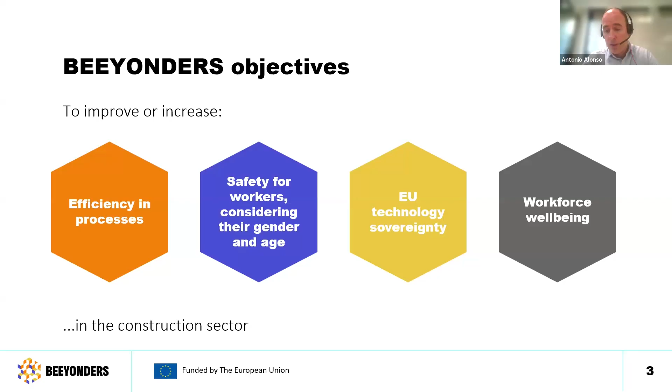Next, please. Well, the main objectives of BEEYONDERS are based on 4 pillars. To increase the efficiency in processes. The idea is to do the same with less energy, or in a better way with better productivity, with more safety, improving efficiency in terms of energy. The second pillar is to increase the safety for workers, considering their gender and age. The project is very well focused on these aspects. The third is to increase technology sovereignty in the European Union, trying to use as much as possible technologies made here in Europe, and to generate new technologies here in Europe. And the fourth pillar is to increase workforce well-being. This is an important aspect for this project.

As we have said, we have 21 partners. We have consultancy companies, technological centers for development of robotics, digital twin developers, partners for communication and dissemination, experts in concrete, in 3D printing in concrete, biologists. We have managers of highways, experts in LCA and LCC, experts in wearables, exoskeletons, experts and associations of workers, experts in standardization, manufacturers of construction machinery, experts in monitoring, and of course construction companies. At Acciona, we are also a construction company, very interested in the development of all these technologies.

The technologies that we are going to see today in this workshop are mainly three. We have focused our work on autonomous and teleoperated ground and aerial vehicles. In fact, we will see today an autonomous mobile robot for infrastructure maintenance. We will see autonomous wheel loaders, and we will see drones working all together to improve the efficiency in roads.

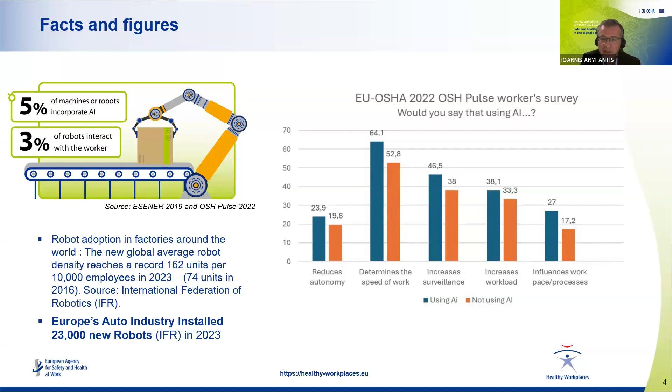So when it comes to applications like those that are included and discussed in your project, we can see that when we are having, for example, robots interacting with workers, or when we are having wearable devices, workers report more time pressure, job insecurity, poor communication or cooperation, and long or irregular working hours as some of the potential risks. To that end, at EU-OSHA, we always support initiatives and projects like the BEEYONDERS project, since the inclusion of safety and health provisions since the design phase is the most effective approach when it comes to the protection of workers.

And this project and the previous research that we have conducted present that the technology and the use of digital technologies have significant opportunities when it comes to occupational safety and health, but also when it comes to performance. But risks should be effectively managed in order to protect workers as well.

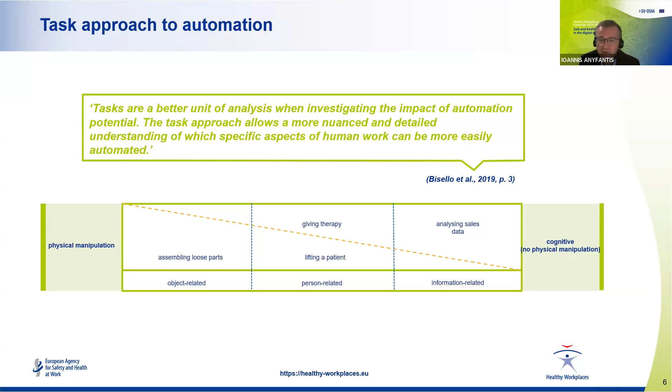So these new digital applications and AI can actually perform some tasks. And ideally, the most dirty, the most dull, and the most dangerous tasks should be performed by machines or these kind of automations, and the most creative tasks should be performed by the workers.

And in order to identify the risks and the challenges and opportunities associated with occupational safety and health, we developed this taxonomy on systems that would also allow inclusion of technologies that didn't exist back at that time. I think that we started the development of this taxonomy back in 2020, and applications and technologies such as generative AI and GPTs didn't exist back at that time.

So the main categorization had to do with whether the task was physical or cognitive, or a mixed task. If the task was a routine task or non-routine task, and if we were talking about assistance in decision making, for example, or full automation and substitution of the workers in performing these specific tasks. Of course, in this short presentation, I cannot go into all the details of this research because we are talking about more than 5 years of research and 5 big overview projects.

However, I will just mention that when it comes to the automation of tasks area, the main sectors we identified, both based on the literature but also based on the actual market in the EU and outside the EU, were manufacturing, transportation and storage, human health and social work activities, professional, scientific and technical activities, and construction.

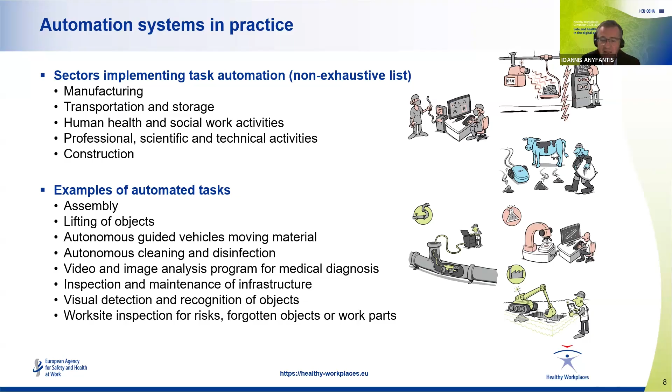And in order to approach our audience in an easier way, because digitalization is not the easiest topic when it comes to occupational safety and health, we developed several case studies. In total, more than 50 case studies were developed for all these different areas that I mentioned, 16 of them on automation of tasks. And for each one of these case studies, we developed a cartoon-style representation in order to present the solution presented in the case study in an easier way.

So one of the case studies which we developed had to do with vehicular automation. Think about a software and hardware automation system installed into an excavator, for example, that would allow this construction equipment to dig trenches in an automated way. So the operator was not on the machine anymore. The machine could operate either in a fully autonomous mode or the human operator could still supervise the process from a nearby location.

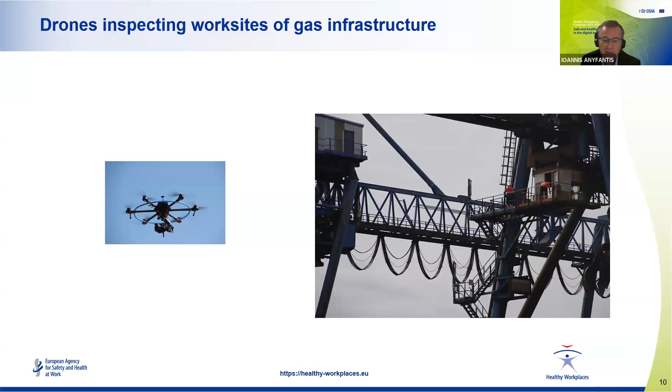Another case study that we developed had to do with some drones inspecting work sites on gas infrastructure. So these drones were used in order to identify if there were any forgotten tools after specific maintenance procedures were performed, a task that in the past was performed by workers and was considered to be a dull task. Now it could be performed by those drones and could improve the performance of the process.

In general terms, the main opportunities and challenges for occupational safety and health were categorized in three main categories, dimensions that are the physical, the psychosocial, and the organizational. In there, we identified issues that had to do with job demands. The issues of job autonomy were extensively discussed.

Trust and job transformation, and specifically the impact on mental health, like stress and anxiety, when it comes to these automations and increased risk of developing this kind of psychosocial stressors, let's say, to workers.

When we are talking about trust, we are talking about trust in the technology, but also the different ways that the work site should be organized now, because the introduction of such intelligent machines is changing the whole way that the job is performed. And it's not like a simple automating system like those introduced in workplaces in the past.

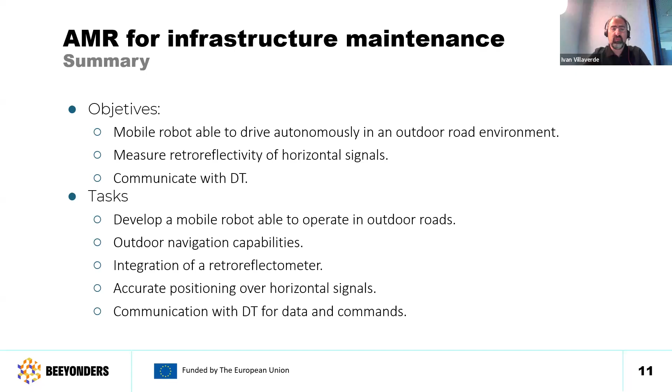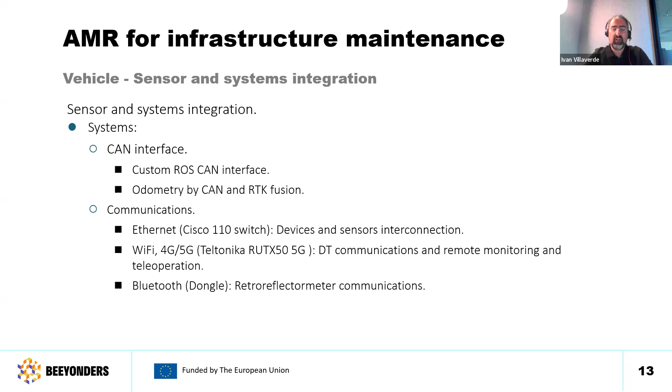Next slide, please. But the key sensor to be integrated for this application is the retroreflectometer. It's the sensor that is actually used for measuring the reflectance of the horizontal lines. So two aspects of the integration have to be considered. On the software side, we have developed a custom ROS driver, which allows us to control the device wirelessly through a Bluetooth connection and directly from ROS.

And the hardware integration was a bit more tricky, mostly because of the clearance requirements of the sensor, which required it to be placed very close to the floor and with enough free space in front of it. So, next slide, please.

So the initial designs were those you see here. Basically, they were very basic cushioned platforms in which we mounted the sensor. We discarded these early designs because we considered it was too dangerous for the sensor to be so close to the floor, only 11 millimeters at all times, while the robot was driving fast on the road.

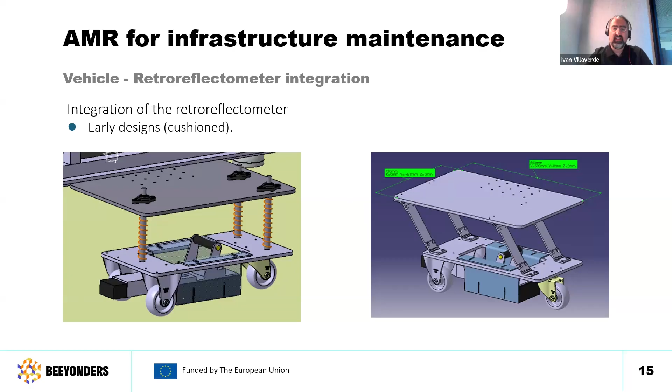So if you remember the picture in the second slide, I think, there was not much protection for the sensor and all the equipment that we had put on the platform. So the first rainy day of testing, and we surely get a lot of those here in the Basque Country, we realized that it was not a very bright idea to have all the sensors like that.

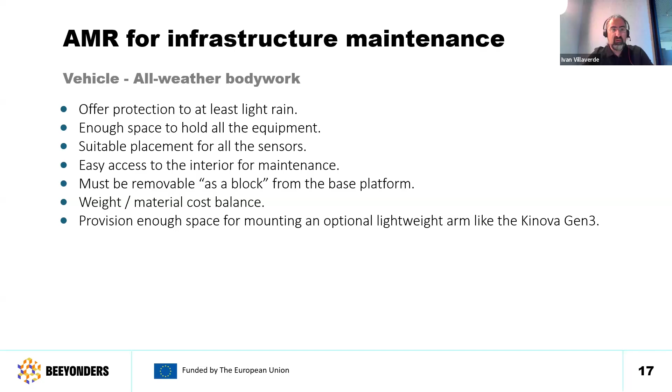So we thought we had to install some kind of all-weather bodywork that offers some protection from at least light rain, with enough space for all the sensors and other equipment, and with some requirements like an adequate weight-cost ratio, being easily removable, etc. So next slide, please.

Next slide, please. This bodywork is also complemented with several 3D printed parts that we use to protect external elements like the cameras and the lifting mechanisms of the platform and so on. Next slide, please.

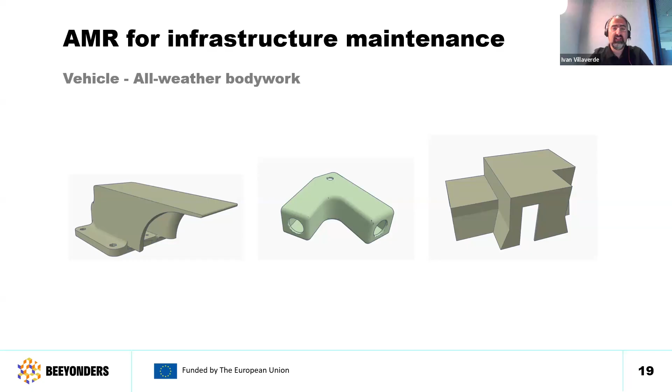We also considered some additional designs to protect the sensor, mostly from debris and splashes, but we didn't include them in the final prototype because we didn't find them really necessary, and they were adding a lot of complexity.

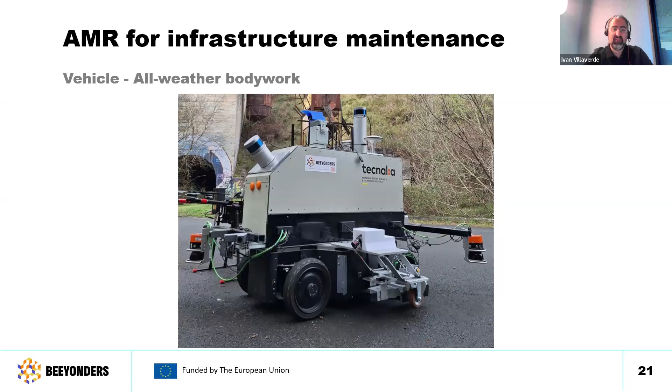So next slide, please. This is the final implementation of the bodywork as it was used in the initial field test. From this one to the final demonstrator, we made only very minor changes. Basically, we changed the position of the GPS antennas. Basically, that's it. Next slide, please.

So once the AMR prototype is completed, the next step is to equip it with the required autonomous capabilities, starting with autonomous navigation. In this case, we wanted to test three different available approaches. The first one is the ICARS commercial solution from LS2N. The second one is a custom 3D navigation suite that we have compiled here at Tecnalia from off-the-shelf components available in ROS. And finally, we also wanted to test a GPS-based solution for featureless scenarios where a map-based approach could be difficult to apply.

Also, the three approaches have an additional layer that translates the robot's estimated position in its own framework to UTM coordinates, so it's easier to integrate with external systems having a common framework. So now we are going to briefly review these three approaches.

So next slide, please. The ICARS solution is a commercial system based on 3D LiDAR, GPS, and inertial fusion. It uses 3D LiDAR to perceive its environment, but it flattens the 3D scans into two-dimensional maps. This 2.5D approach is more robust for outdoor operations than purely 2D approaches, but it still doesn't take full advantage of the 3D information provided by the LiDARs.

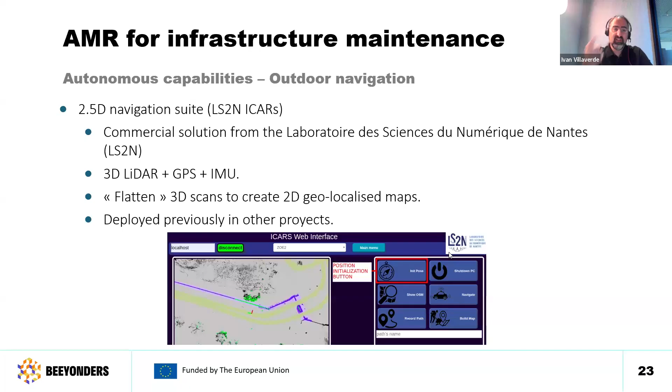So next slide, please. We also tested this full 3D navigation suite. This is a suite that was compiled by us in Tecnalia as the result of previous EC projects. We basically integrated several independent solutions into a single, easily deployable 3D navigation suite that we have successfully used in various robots right now. It's basically based on three rather common or popular modules. So we use LIO-SAM for mapping, HDL for localization, and for planning we use a combination of grid maps, estimation of the transitability, and the ROS standard navigation stack.

So next slide, please. So basically what we do is we use 3D LIO-SAM to create a 3D map, as the one you see here in the top left. And this map, we use it along with HDL to provide a localization within this local framework.

From this 3D map, we also extract the floor as a surface that you can see there in the bottom left. And we use this surface to estimate what we call a transitability map that tries to represent the places where the robot is actually able to reach. We calculate this transitability map based on the slope and the roughness of the floor surface. So next slide, please.

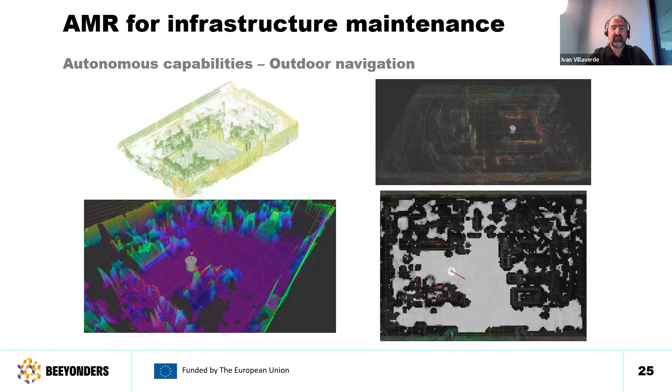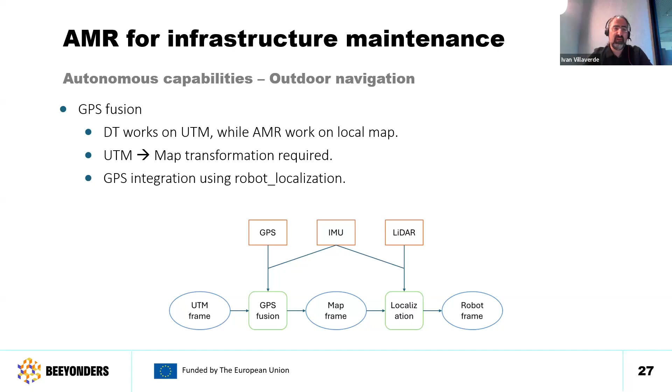So next slide, please. So for the GPS and inertial fusion, we have used the robot localization module that is also a rather popular module in ROS. In this way, we are able to provide the robot pose in UTM coordinates regardless of the local world representation used for localization, whether it's 2D map, 3D map, or mapless.

So next slide, please. So the second requirement for autonomous capabilities is the measurement of horizontal signs with the retroreflectometer. So this device needs to be placed very accurately over the line to be able to provide good readings. So to guarantee that, the robot should be able to detect the line and to direct itself to the correct position. So next slide, please.

So for this task, we follow a visual servoing approach. We use a camera mounted coaxial to the sensor, just over the sensor in the liftable platform, to capture images of the line that is in front of the vehicle. The line is detected in the images, and we calculate a vector that represents the direction of the line. This vector provides the distance of the line to the center and the angle from the correct alignment.

So these two values are fed to a PID controller that calculates the steering and the speed that the AMR requires to drive the sensor to the correct position. So next slide, please.

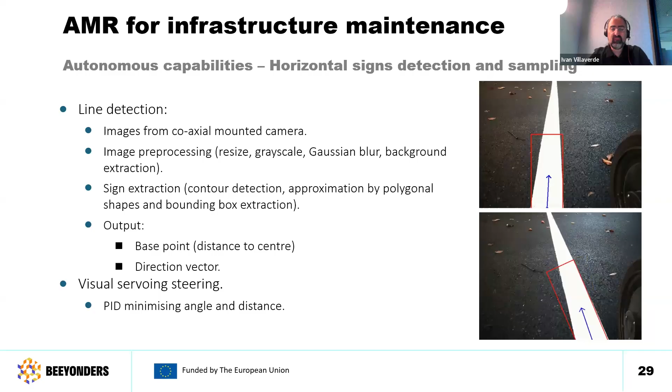So next slide, please. This takes us to the final autonomous capability, which is to be able to carry out arbitrary measurement missions. So this functionality is achieved using Tecnalia's Flexbotics Execution Manager. This is a system based on state machines that are able to execute missions or tasks defined as a sequence of skills. So the missions that we receive from the digital twin are decomposed in those skills like navigate to, detect line, deploy sensor, etc., creating a state machine-based mission that we can execute with the system.

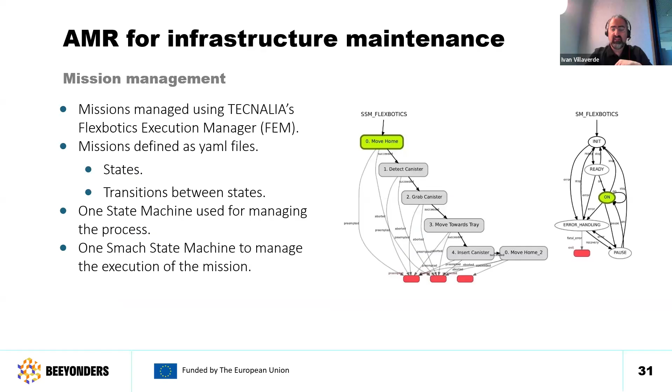So next slide, please. So we have made several testing rounds of the system. The testing during development was done at our facilities here in Donostia. We were pretty lucky because the parking was empty due to ongoing construction works, so we were able to use it for testing. So during these tests, we focused on testing the platform itself, the vehicle, and the different modules, but independently. So next slide, please.

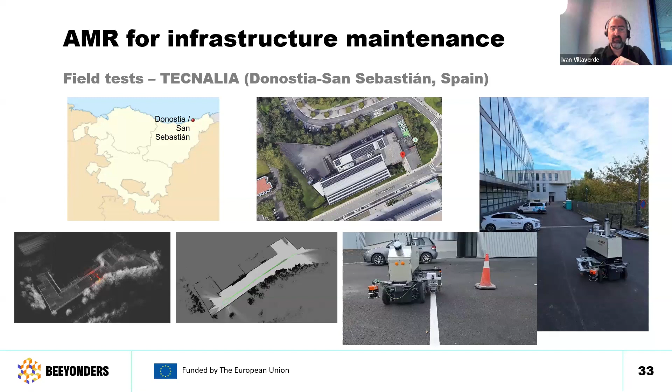So this early test of the almost complete system allowed us to really reduce the technological risk of going directly to the final demonstrator and to identify some improvements that were implemented for the final demonstrator, like for instance the updated placement of the GPS antennas that I mentioned earlier. So next slide, and with this, I conclude my presentation.

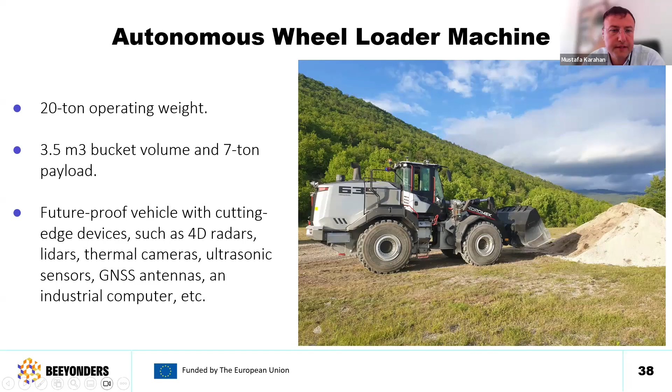For building the autonomous machine, it is mandatory to communicate between the industrial computer and the machine's own systems, such as the steering system, brake hydraulic or implement system. So we developed algorithms and software concerning the operator's and machine's conditions. Next slide, please. Could you please click the video?

As you see in the video, this machine is controlled autonomously. There is no human control. The machine follows the trajectory and loads the gravel. So the map of the location was created from the data recorded by the drone's onboard sensors and adapted to the autonomous wheel loader. For this case, first the drone mapped the area, then sent the wheel loader. We established communication between the wheel loader and the drone. Next slide, please.

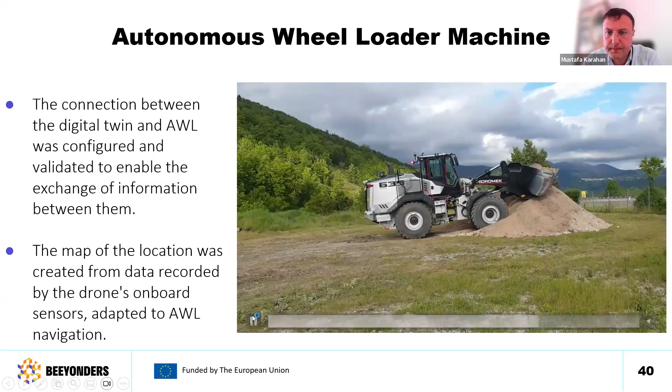Video. During the road construction use case, a typical and very common operation named Y-cycle was tested and validated. It is very common for this case. And we illustrate the autonomous and teleoperated functions. Next slide, please. In the Y-cycle use case, or load and unload, the machine needs to load the bucket fully, then needs to unload in another area or in a dump truck. Next slide, please.

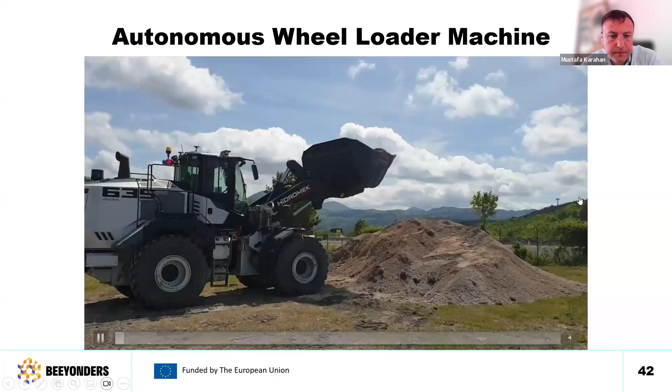Click the video. The other very common working condition is load and carry. The machine loads the gravel or debris from one place and carries it to another place. So in this video, the machine detects the obstacles in the field. Then it is possible to unload the bucket by detecting any obstacles in the field.

In this test, the machine traveled from point A to B autonomously and safely. It followed optimal trajectories by avoiding any obstacles, in areas which are frequently accessed by human operators or any machines, any vehicles.

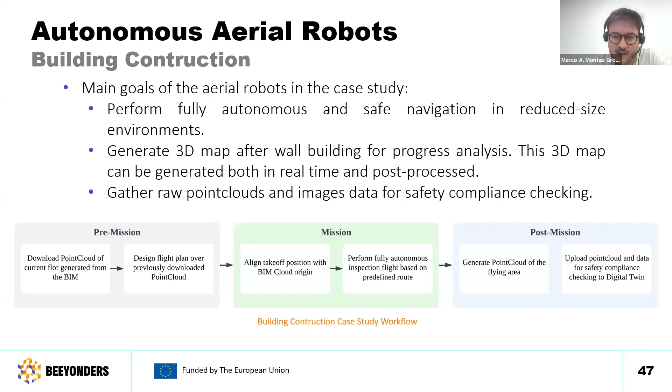Next slide, please. This is a small overview of the software architecture. Maybe it's too technical, but the good point is that it's designed as a modular architecture in order to allow the operator to change things if needed. For example, if you want to change the localization algorithms, it's easy to change, or if we want to change the navigation, it's easy too.

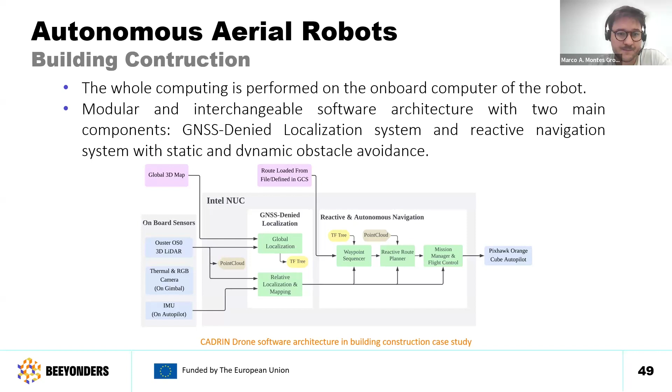the safe navigation. One important and remarkable thing is that all the operation is fully autonomous from the takeoff to the landing of the drone, and everything is computed on board. So in the case that, for example, you lose communication, the drone will finish the inspection in a safer way. So next slide, please.

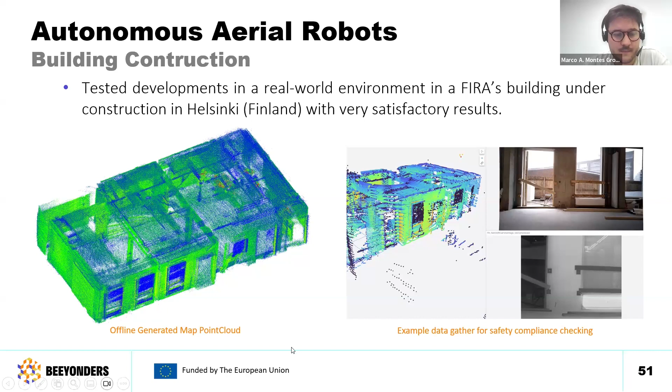And on the right, we can see how these RGB and thermal images look with the point cloud in order to perform these safety analyses and so on. Next slide. Okay, that's all for the building construction case study. Right now, I will explain the outdoor case studies.

In this case study, the advantage that we have is that we will use GNSS localization. So we focus on or reinforce different things. In the case of road maintenance, the main objective was to be able to perform an assessment and analysis of the road and the environment of the road in real time and inside of the drone.

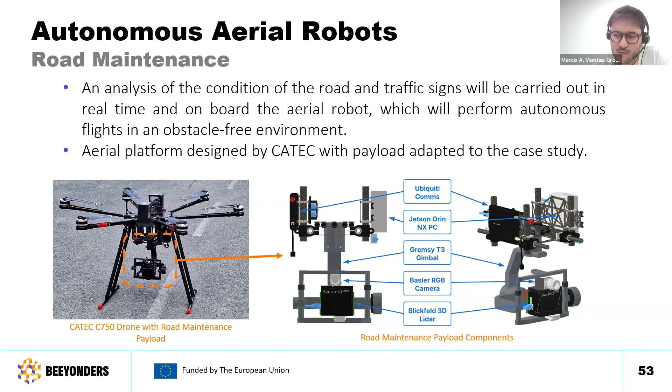With the camera, we will be able to see the road and to perform this image analysis. And with the LiDAR, which is perfectly calibrated and aligned with the camera, we will check the state of the vertical signs. So next slide, please. As before, this is a small overview of the software architecture.

We focus on the design and development of a very modular software architecture in order to easily be able to change, let's say, the focus or the tasks to be developed by the drone. But if it's needed, we can reuse the drone itself. So next slide, please. Okay, this is a video of the drone itself flying in L'Aquila in Italy.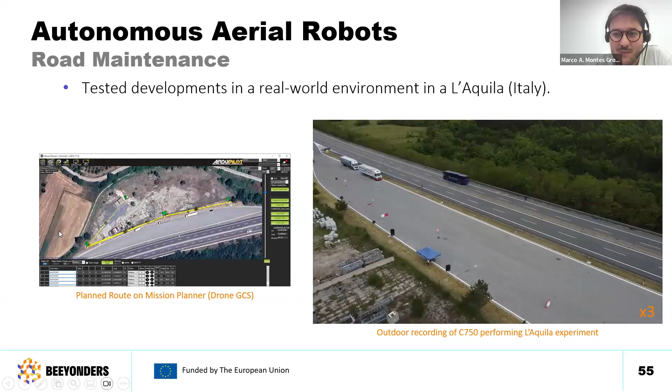Okay, and finally, I will talk about the road construction use case or case study. The main goal of the drone in this case study is to create a 3D model of the environment in order to allow the other machines to work and to perform some assessment, for example, to measure the earthworks and so on.

So the first part is to define the mission part, where you can, for example, select how much overlap you want on the images for the photogrammetry, the flight speed, the area to cover, and so on. After that, during the mission, we perform data gathering of the environment. Finally, after gathering the data, in the lab we generate this 3D photogrammetry model and send it to the digital twin to allow the other robots to work with it.

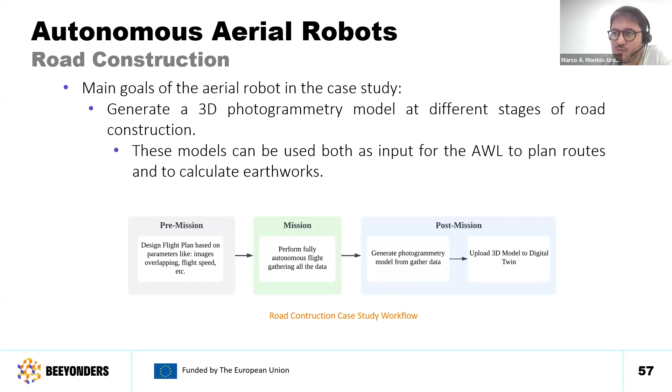Okay. We will show an example of 3D models that we created in L'Aquila, and those are the fixed trajectories that we designed there. The good point is that you will be able to run exactly the same trajectories on different days and at different moments of the year. So this is very nice because you will be able to assess the progress of the road construction by using these 3D maps.

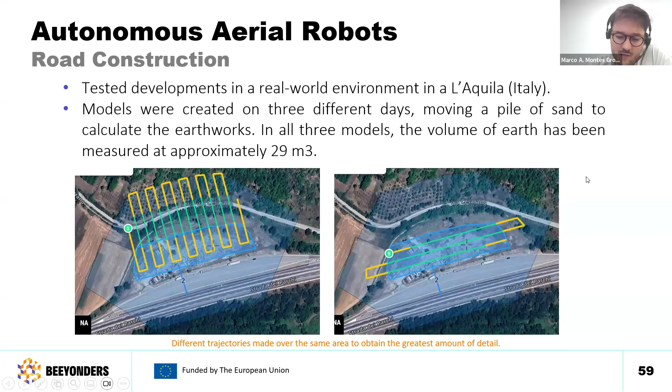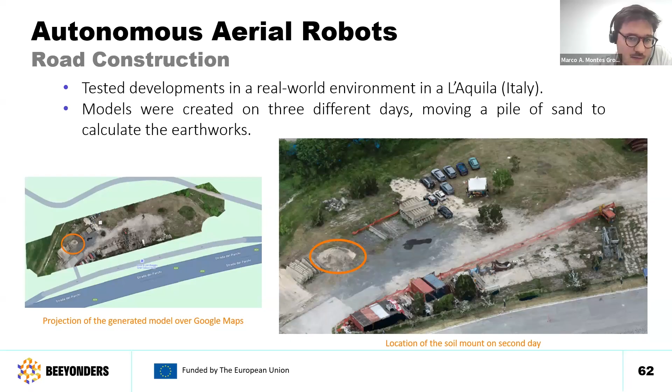It's nice because it can be seen perfectly how the area where the soil mound was is flat, and now the mound is near it. And next slide, please. And finally, we moved it to the other side of the construction area. The good point of this image is that we can see how the first and second places are fully empty, but now the mound is in a different location.

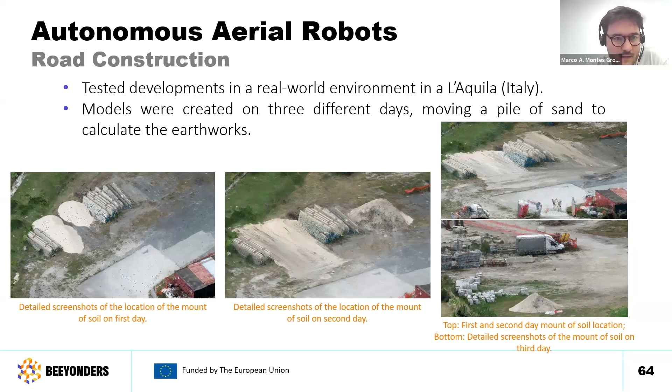So next slide. This slide is only to show you a detailed screenshot of the different positions of this mound of soil during the days, and how with the disposition on the 3rd day, the areas of the other days were clean. And I think that's my last, no.

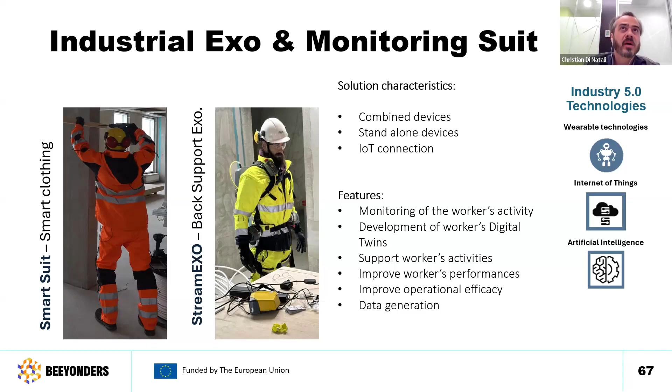So today I'm going to present to you these 2 devices that we call the Smart Suit and the Stream Exo. Those 2 devices basically integrate Industry 5.0 technology such as wearable technology, Internet of Things, and artificial intelligence. I'll try to show the features of those 2 devices in the next slide. Yeah, you can move on.

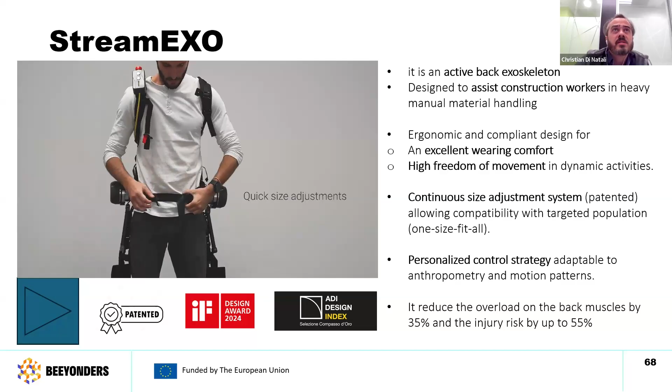I will start with the exoskeleton. You can start the video. So this exoskeleton is called the Stream Exo. It's an active back exoskeleton. We have 2 motors on the side to support the back while doing manual material handling activities. It's worn like a backpack, as you are seeing in the video, and it's been designed for construction workers. So we respected the requirements and the specific things that were needed to develop such a wearable technology.

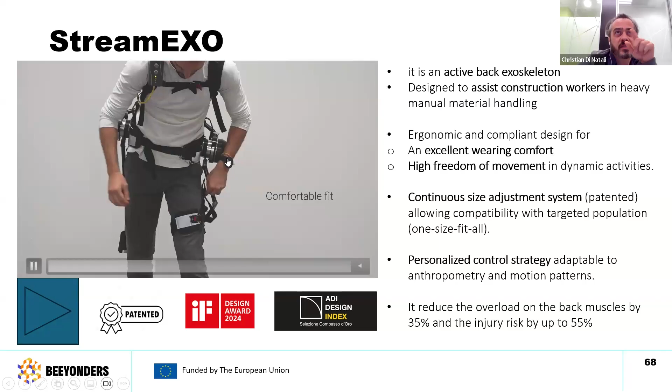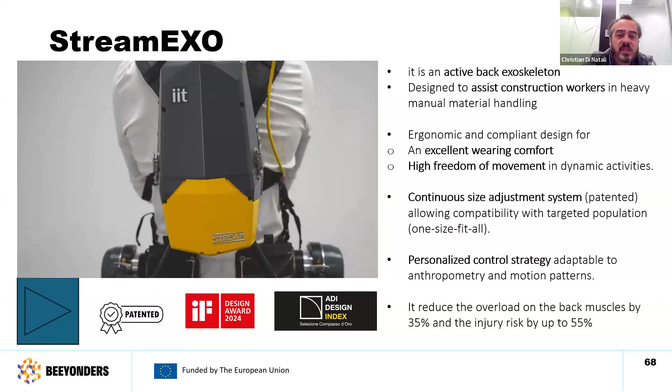As you can see, there are red straps to show where you can remove them quickly, and we also have magnetic buckles to help the wearing phase. So we improved the design of this exoskeleton from our lab prototype in order to improve the wearing comfort and provide high freedom of movement for the workers, to allow them to make a deep squat as you are seeing in the video.

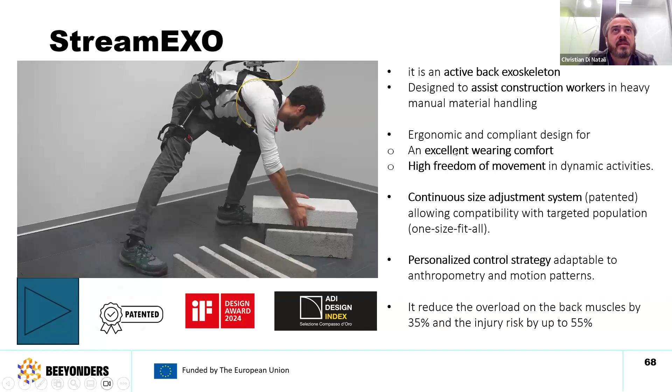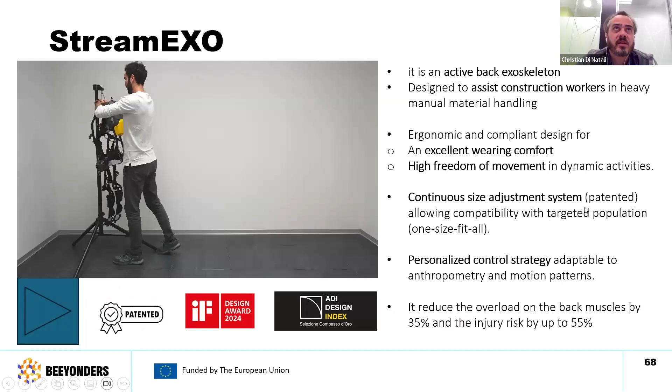This design is also protected with a patent and allows one size fits all. So this allows different body sizes and weights to wear this exoskeleton, which allows us to do the tests in the company. You can move on to the next slide.

Okay, so I'll present some results. This is based on a publication we have. It's written down there, so if you want more information, you can look for that. This is mainly a lab study, where we measured the muscle activity of the most important muscles related to the task and to the interaction with the exoskeleton. We did manual material handling activities that required dynamic lifting or static posture, and measured the assistance as the reduction of muscle activity with the exoskeleton compared to without it. So we usually do 2 kinds of tests, one with and one without the exoskeleton, to compare the effect.

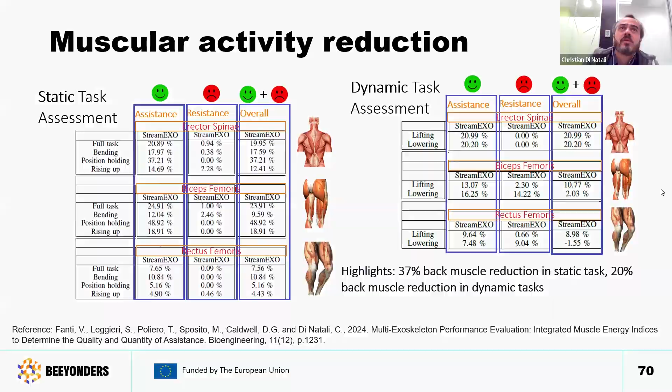So we measure the muscle activity of the spine, of the erector spinae, and we measure that while lifting those loads; the muscle activity was reduced by 17%. And we made, let's say, a study related to the equivalent weight. We introduced this approach, we call it equivalent weight. So we associate a sort of reduction of load thanks to the exoskeleton.

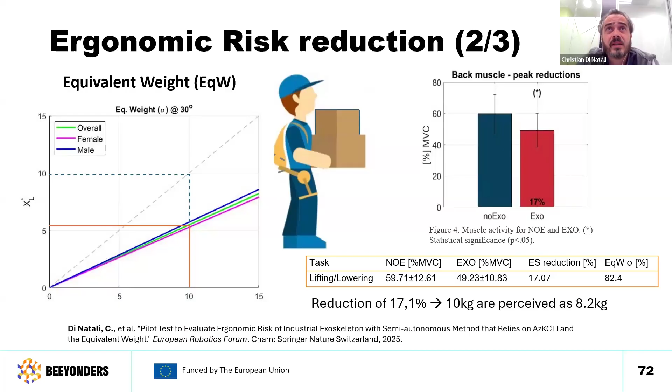Let's move to the smart clothing. We developed this device that we call Smart Suit. We have 2 versions, but the last version we developed and tested at FIRA in Helsinki is the total body version that integrates 10 IMUs, inertial measurement units, to measure the kinematics of the whole body, and 2 EMG to measure the muscle activity of the forearm. We also have an edge computing device that acquires the data in real time from all of those sensors and runs some real-time algorithms before streaming data to external devices.

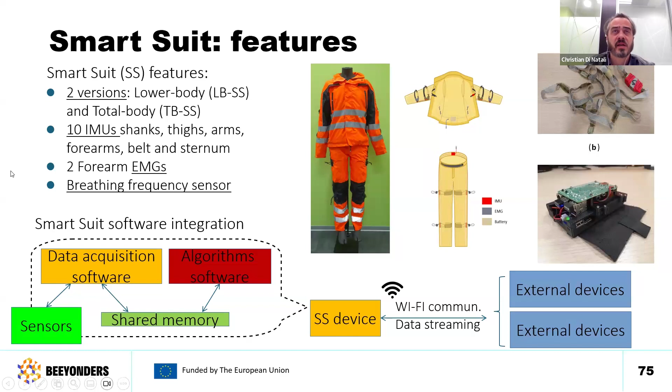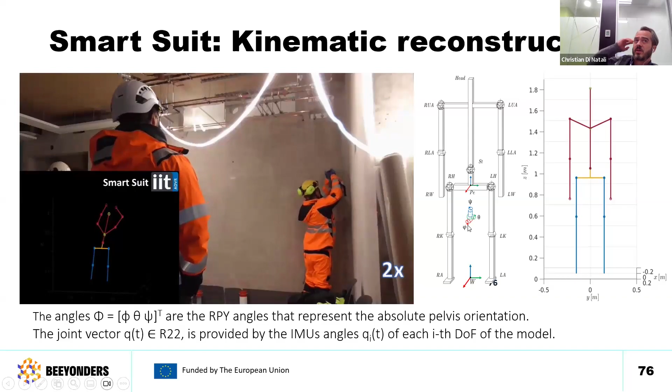Next slide, please. So this video shows basically the test done at FIRA with the worker. So this is TRL 6, like the previous one for the exoskeleton. You can see real-time reconstruction of the full kinematics of the user while moving and doing whatever they are doing, related with the work and not. And you can move on. The next slide shows an application of this technology related to the analysis of the ergonomic risk.

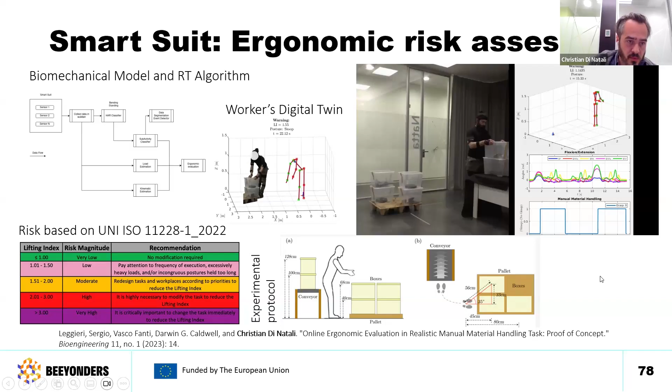You see some information related to this in the slide. And so we can provide a lifting index in real time every time we finish one task. So we can keep track of this and provide information to the user in case they start to do wrong movements. So I think you can move to the next slide. It should be all from my side.

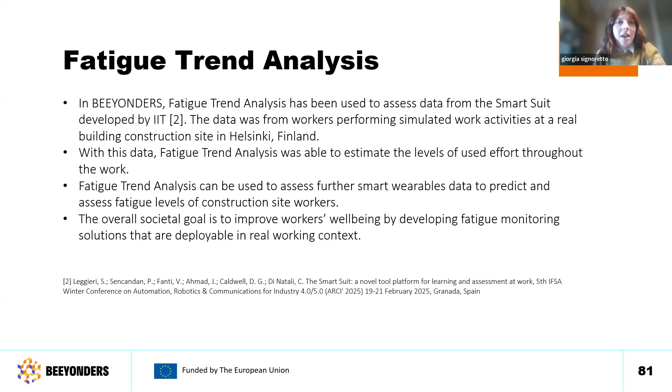On top of this, we have developed an IoT infrastructure to ensure that the data that we register from all these technologies can be transmitted to the digital twin, where they are further processed or visualized when needed. So in the next slide, we start with the indoor localization system, whose main purpose is basically to detect the time instant when specific operators enter or exit a specific apartment.

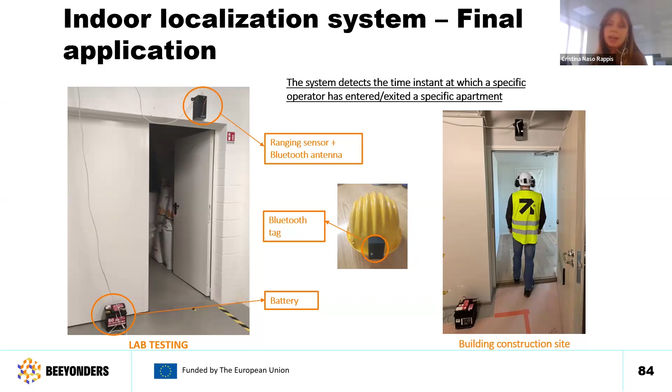Because one of the main ideas of the system is that we want to be able to filter out all those signals coming from workers who are not crossing the door, but maybe are just standing in its proximity. So in the next slide, you can see some tests that we have done that try to explain better the capabilities of the system.

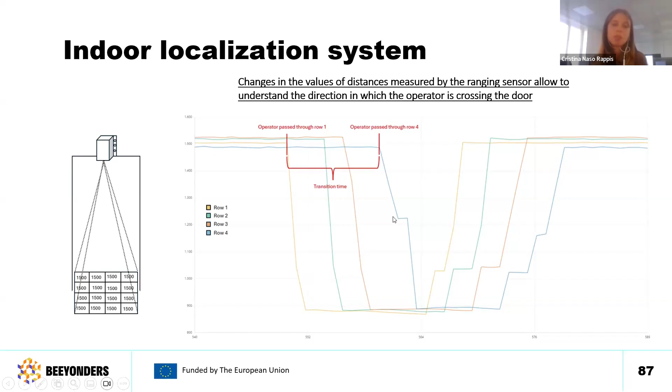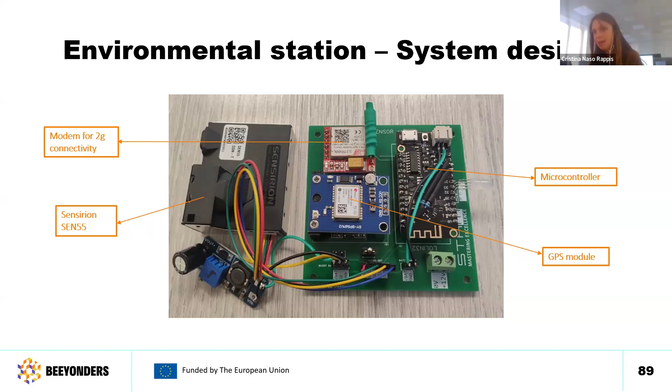Inside this wearable device, we have an RTK receiver, which is used to track with precision the location of the worker. So in BEEYONDERS, we have developed this infrastructure where, in real time or semi-real time, we compute the distance between each worker and the autonomous vehicles that are on the site. And if we see that this distance falls below some predefined thresholds, we send back a signal to the worker.

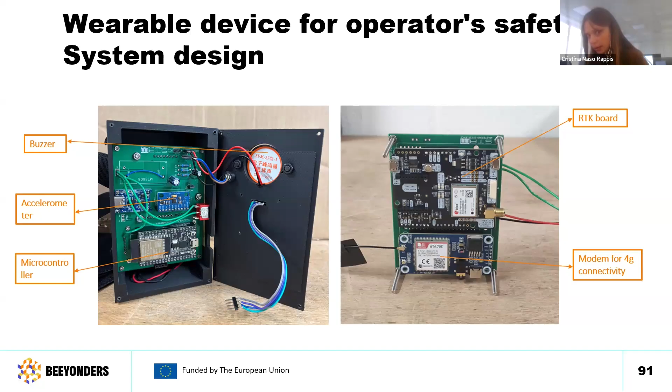So this communication is carried out through the MQTT broker. So basically, we have some topics that we use to publish the data that we retrieved from the technologies, and then also send back some feedback, as I mentioned before, in order to alert the workers if they are in some dangerous situation. And I think this was all for the wearable device.

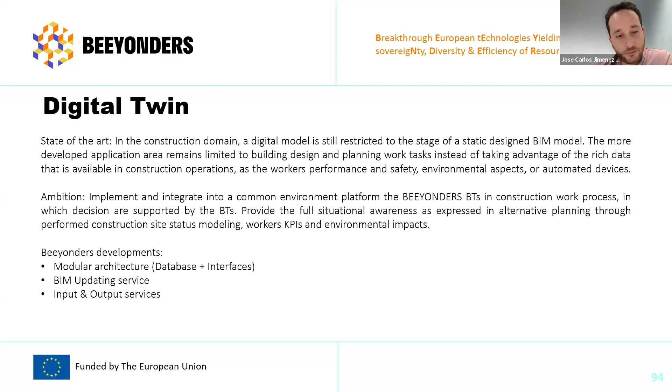So the ambition here was to implement and integrate into a common environment platform all these technologies in the construction work process that have been demonstrated in the use cases. So with this, we can provide full situational awareness of the state of the construction, and also provide a decision support system. So next, please.

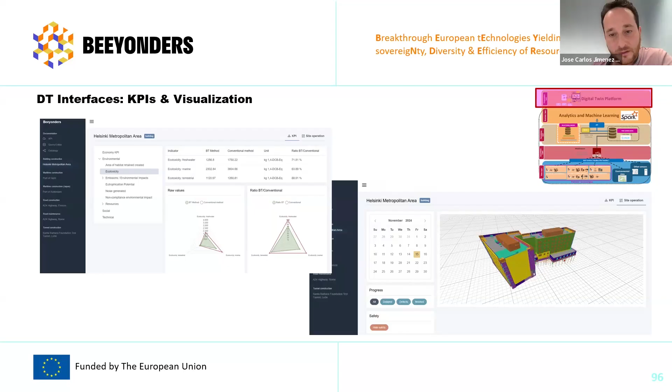On the other hand, we have the site operation. For example, here you can see the digital model, and this is the situational awareness part of the digital twin. So here in the building, for example, you can check if you have any delay in the progress, any safety issue, etc. So next, please.

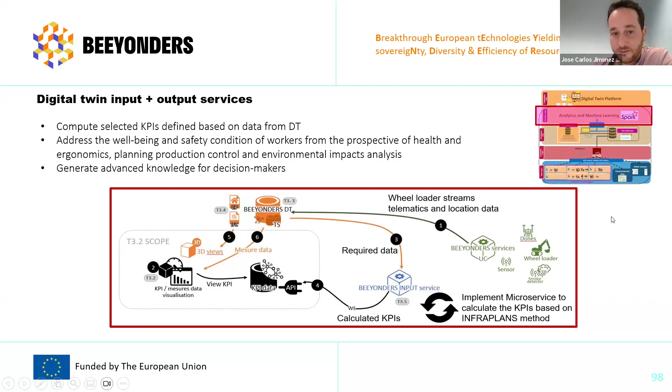And on the other hand, we have the digital twin input and output services. The idea of these services is to compute the selected KPIs based on the data to address the well-being and safety conditions of workers for health and ergonomics, planning, production control, environmental impact analysis, all the aspects that we defined for the project. And as I said, this is to generate knowledge for decision makers. And next, please.

Also, where we are using the autonomous wheel loader, we can provide an environmental analysis, because from the telemetry of the fuel consumption, for example, we can estimate different kinds of emissions, so we are able to detect if we are surpassing any dangerous value for any component.

And to finalize, as we have a digital version of the reality, we have used this environment to develop training models where, using virtual reality or other digital tools, we have deployed this kind of training based on real scenarios. So this approach can help towards a much safer construction environment for the future.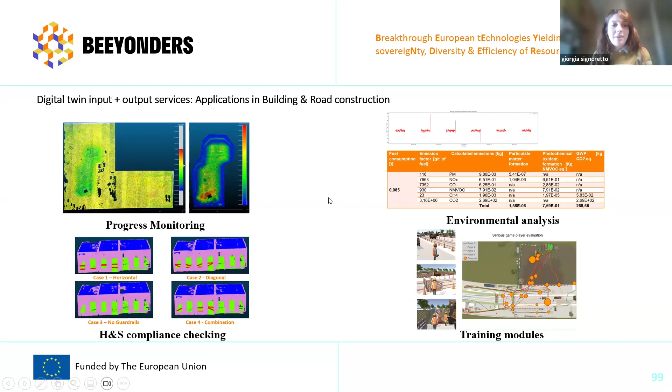So now we are moving to the pilot sites and testing. We already heard a bit during the technologies presentation about the pilot testing, which was done in different member states. The first one will be road construction, followed by road maintenance afterwards. This was done in Italy, on the highway near Gran Sasso Nord in May.

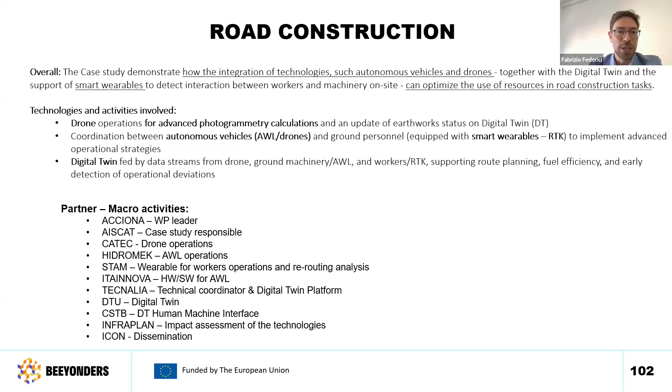So the road construction use case wants to demonstrate how the integration of technologies such as the autonomous vehicles, the drones, the smart wearables, integrated in the digital twin environment, can optimize the use of resources in road construction. So, as I said, the technologies involved are the drone for the photogrammetry calculation, the autonomous vehicles for the earth movements, the smart wearable RTK for tracking and safety of the workers, and the digital twin for managing all those technologies.

So we tested all those technologies in a depot area of Strada dei Parchi. Strada dei Parchi is the company that manages the A24 highway. We tested near the city of L'Aquila in central Italy, in a very big depot area, 8,000 square feet. The test campaign was made in May with 4 active days, in which more than 20 people tested the 3 technologies: the automatic wheel loader, the drone, and the RTK.

Next slide, please. So with this scenario, we want to simulate the first steps of the construction of a work zone, basically focused on the movement of the soil, of the earth. We agreed a basic workflow, a Beyonders workflow, about these technologies. Then we broke this workflow down into different tasks to be compared with the traditional activities for the construction of a work zone.

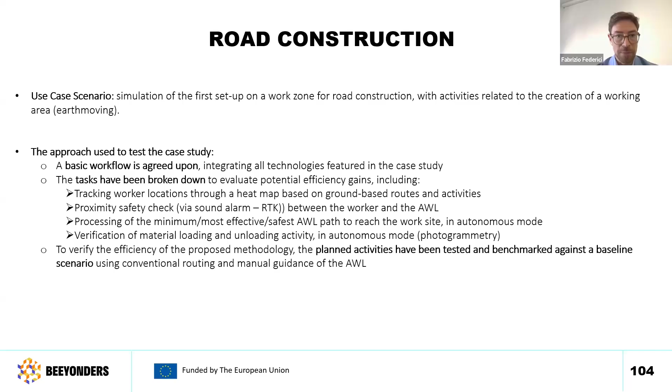So this is the Beyonders basic workflow for road construction. At the beginning of the day, the user, the road manager, accesses the digital twin interface to check the scheduled program for road construction of the day. The digital twin activates the drone to do an initial photogrammetry of the area, in which all the main places are detected, like the pile of material, the position of the automatic wheel loader, the position of the workers.

And thanks to this survey and the RTK survey for the positioning of the workers, the digital twin defines the initial path for the automatic wheel loader.

The automatic wheel loader communicates to the digital twin that it is ready to perform the activity, the digital twin sends the commands, and the autonomous wheel loader reaches the location and performs the earthwork, loading and unloading the pile. Meanwhile, the workers can conduct their work in an adjacent area. All the steps are repeated until the pile of material is completely moved or the task is done. We can move on to the next slide.

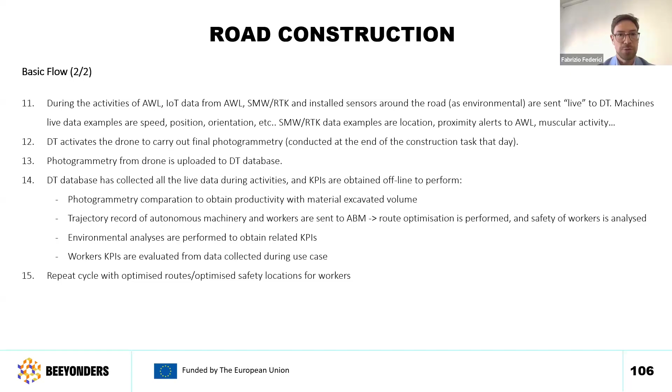We can move on. Thank you.

So during the field test, we verified the capability of each technology in the real scenario. For the smart wearable, we recorded the data from workers' trajectory while the autonomous wheel loader was in motion. There was a trigger of alarm when workers approached too close to the autonomous wheel loader, and the calculation of the optimal trajectory for the wheel loader based on the recorded trajectory of the workers, thanks to an agent-based simulation.

With the drone, we verified the photogrammetry and the comparison of the photogrammetry between the beginning and the end of the day. And the autonomous wheel loader performed the autonomous driving following the best trajectory for worker avoidance. We can move on.

From an end user point of view, what changed between this approach and the conventional approach? With the conventional approach, there is a separation of the work between the workers on the ground and the wheel loader and the construction vehicles. With the BEEYONDERS approach, we can somehow mix these two activities. So we have an increase of productivity because we can mix the activities of workers on the ground and

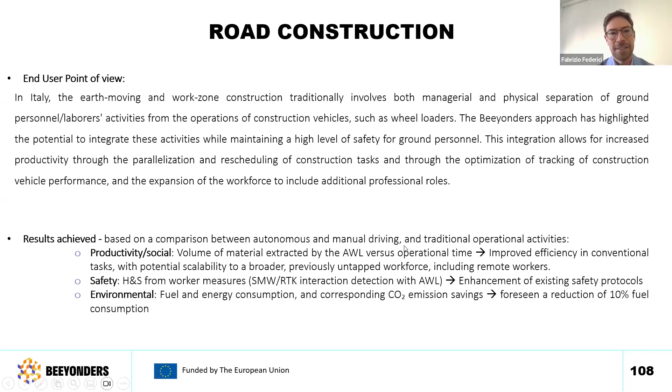For what concerns the road maintenance, we did more or less the same activity with different technologies. The case study wants to demonstrate how the automation of maintenance and surveillance activities, thanks to the integration of autonomous vehicles and drones together with the digital twin, can optimize the required procedures, enhance safety, and expand the range of workers involved.

We tested the drone for surveillance tasks, that means vertical check of the road signs' reflectivity, but also the detection of obstacles on the carriageway. Also the autonomous inspection vehicle for the check of the reflectivity of horizontal signs, and the digital twin to manage these two pieces of equipment. We can move on. We tested those technologies in near-real fields.

We tested in the same zone, but in a different area with respect to the road construction, in a paved area with real road signs, vertical and horizontal. The test campaign was also in May and involved a lot of people. We can move on.

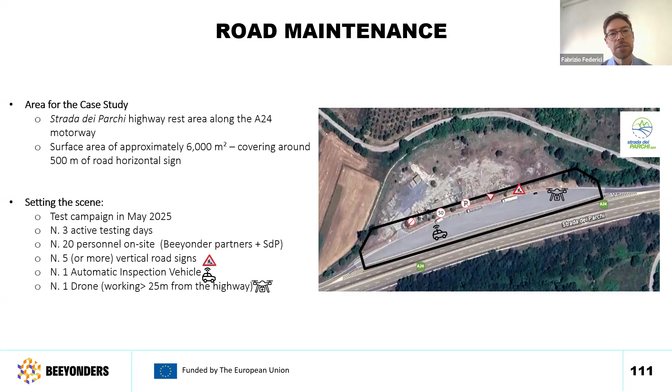We want to simulate a new approach to road inspection. As I said for the road construction, we made a basic workflow for road inspections with the BEEYONDERS technologies. Then we broke down the different tasks to be somehow comparable with the current inspection procedures. The main tasks were the inspection of the road marks' reflectance using the autonomous inspection vehicle, and the drone used for road obstacle checks and the checks of the vertical signs.

We can move on. So this is the basic workflow for the road maintenance. At the beginning of the workday, the road manager programs the road section to be inspected. A drone performs a flyover using LiDAR to scan obstacles like vegetation or animals. The autonomous inspection vehicle conducts a retroreflectivity check on road marking and sends all the results, like the drone, to the digital twin database.

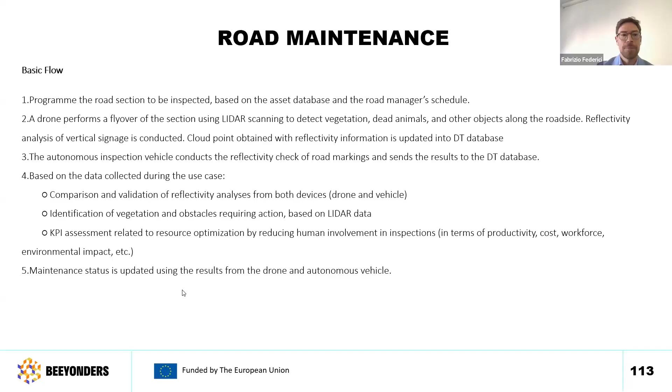And that's it. Thank you, Fabrizio. Sorry for the last slide missing. I will make sure to include them at the end when we upload all the information on the BEEYONDERS website. But thank you for the presentation and for explaining everything about the pilot sites in Italy for road construction and road maintenance.

So now we should have the building construction pilot sites, which happened in Helsinki. But I see that our presenter is still not here, because actually we are a bit ahead of time. Before we were going a bit slowly, but now we are a bit ahead. So I will just keep this for now, and we'll wait for him to connect.

So I will move on to a survey that we did with BEEYONDERS. With BEEYONDERS, we are also working with other European projects in the same field of construction, and we have established this cluster, which is Tech for EU Construction, and here we have from ICON Marco Petazzoni, who will present a survey that was delivered through the cluster.

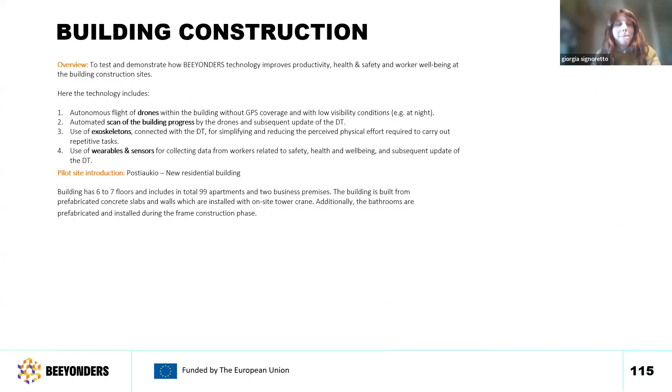And now we have the presentation of the second pilot site, which is the building construction, and was done in Helsinki in October 2024. And I see that Tomi Pitkäranta is here from Flow Technologies, so the floor is yours.

Hello everyone, apologies for the delay from my side. One technical question, will you be sharing the slides all the time? Or... Yes, I have it here. Okay, good, then I'll just tell you when to go next.

Great, so just as background and for the start, my name is Tomi Pitkäranta, I'm from Flow Technologies. We are a managing company and main beneficiary in BEEYONDERS, but we have a long history in developing lean construction methods with our group company and affiliated entity Fira Rakennus Oy, which is a general contracting company operating in southern Finland.

And in this BEEYONDERS project, there's been mainly 3 entities from our side, meaning that Flow Technologies is the managing company, then Decideri, which does most of the lean construction development, and then we've been using these Fira Rakennus Oy construction sites as our pilot sites for this BEEYONDERS work. So that's really the case here.

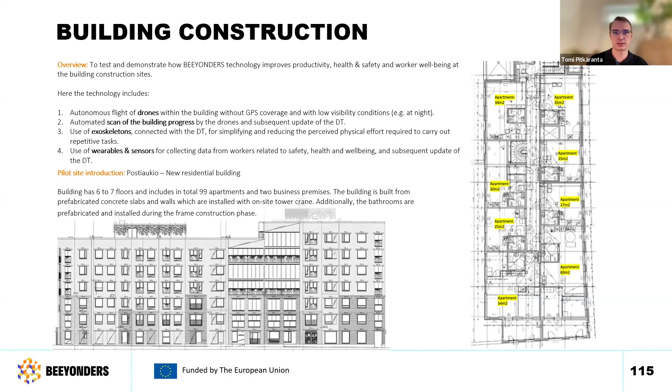So they're mainly done from prefabricated precast concrete slabs and walls, but the projects also included, for example, prefabricated bathrooms, and part of the HVAC units has been done as prefabricated before installing them on site. Please, next slide.

So about the building construction for these projects, we were really focusing on understanding and creating the generalization of the production management methods also for these BEEYONDERS use cases, to really understand what happens at the site, what is ongoing there, and how we can actually bring added value to the existing practices.

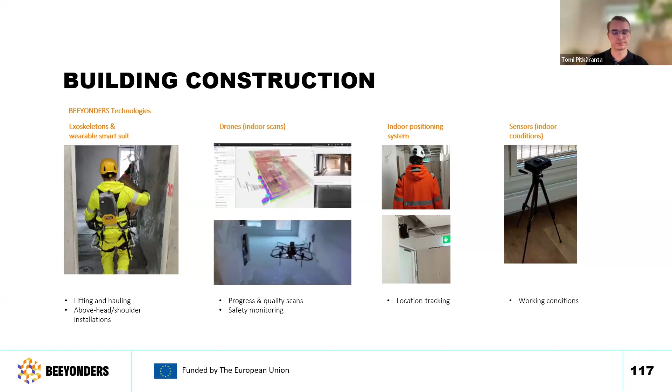Yes, a bit of the results. So really, as said, it was analyzed that there's significantly smaller risk for ergonomic type of safety issues when working with the exoskeleton, because it really supports you in the correct area and helps you with the correct movement of your body. And then also with the sensors, we managed to get these values for the measured reduction in muscular stress, which would mean some increase in productivity, but also that more types of workers can do a wider variety of activities. So that's also an inclusivity aspect in that sense.

And then the drones, well, this is an estimate from FIRA that really if we will be getting these drones working and get those installations done, we could save at least 3, even 8 hours per week for each site manager. So that will mean that, well, on an average Finnish site we have 3 to 5 site managers, so it's like 1 week of work saved just by getting those inspections from those drones.